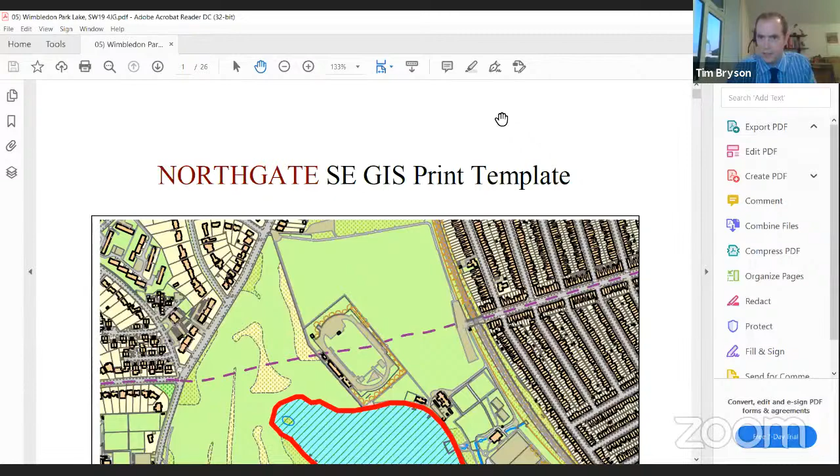Okay, so we'll go straight into item 5, which is Wimbledon Park Lake, and I'm sure we have an officer online who will present this application. Yes, thank you, Chair. Just going to share my screen. Can you see that, Chair? Yes, we can, and we can hear you.

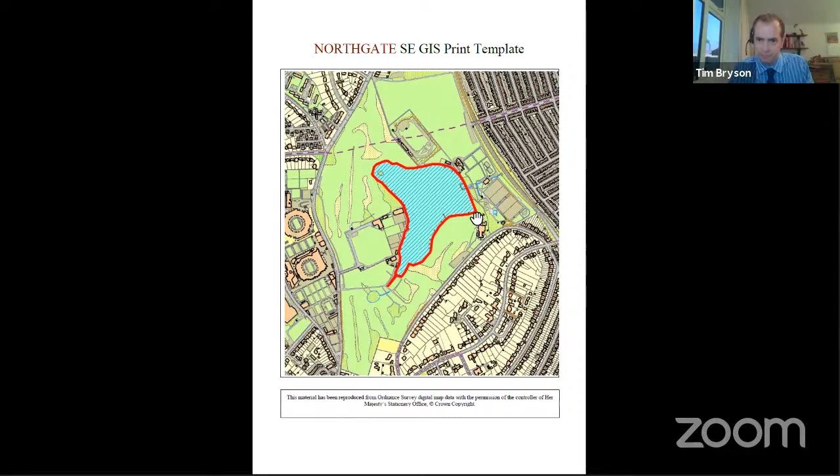Great. Members, the application site is Wimbledon Park and its lake. Wimbledon Park is a Grade 2 star listed park. It is sited within Wimbledon, east of the main site for the All England Lawn Tennis Club. The proposal itself is for engineering works to the existing lake and surroundings in order to make the lake safe as required under the Reservoirs Act.

The application has been put forward. The applicant is the council, with agents representing, as the council is responsible for maintenance and upkeep of the lake. The proposal comprises several forms of engineering operations.

Starting on the northwestern side, an auxiliary spillway is to be created here. What that involves is a replacement of the existing footpath surface with a new one, bedded in at a slight angle, angling down towards the lake. New curb edging is also proposed along the northern boundary, roughly 12.5 centimeters in height.

Further along, the footpath is also to be replaced, all in tarmac surface. Again, further curb edging is proposed along the northern boundary. Additional planting is proposed along the northern boundary as well, and a replacement gravel surface is proposed where that green line is, to accommodate and protect the existing trees immediately adjacent to the lake.

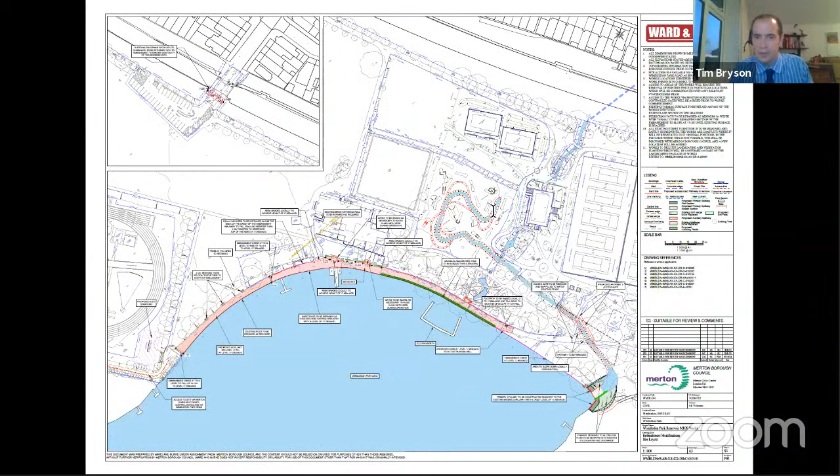A new brook would also be formed through the park to accommodate the water runoff and to hold water back before it is discharged further downstream. That would cut through the existing mini golf area, but once completed, it would not result in the loss of the mini golf zone.

So a lot of the drawings, members, as you've seen in the pack, are very technical. I'm not going to present them all, but again, this is the northern part where the auxiliary spillway is to be formed with replacement surface.

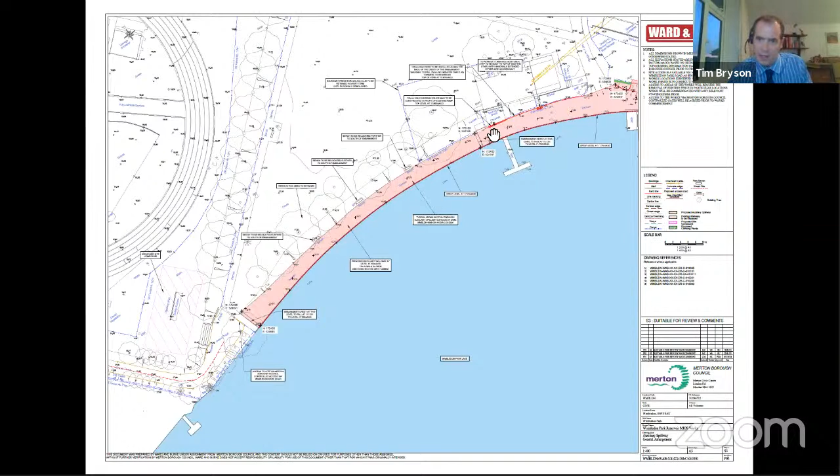Further to the far east, this is a close-up of the proposed enlargement to the existing spillway. The green line here is a proposed eel pass to allow for eels to come in and out through here.

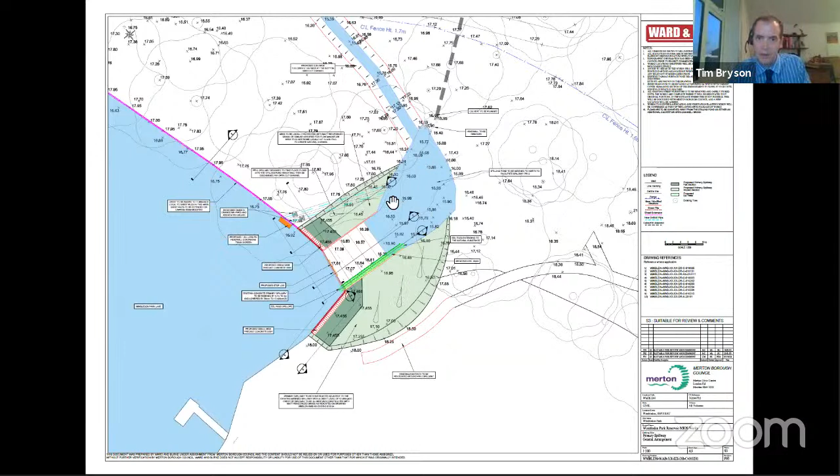This area here and here is the new embankments to be formed, which will be grasscrete. No new tree planting can be done within the new embankments, as under the engineering design, this would not make the embankments work. The existing stilling pond would be widened here.

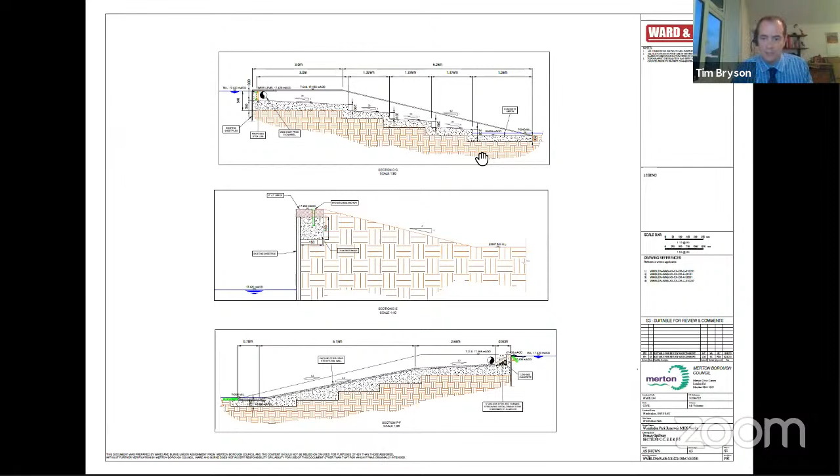One section drawing just showing the new spillway and how it will be formed, largely a stepping in style and design. As outlined in the report, the application has been subject to 4 or 5 years in preparation for the submission through the technical steering group as part of the council.

As outlined within the report, 10 trees are to be removed as part of the proposal to widen the spillway in this zone here. The trees are outlined within the report, the type and species, and the ones shown red here are the ones to be removed.

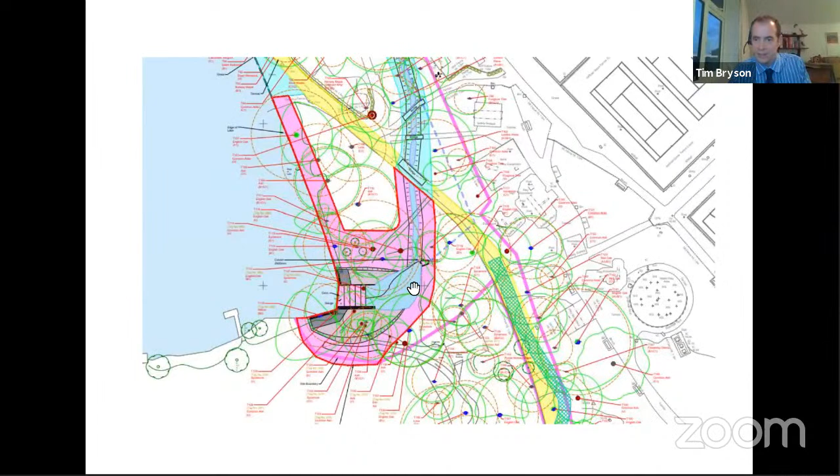You'll note within the report that this area of the site is largely concealed from public view. The children's play area is to the east, and then a large number of trees would be retained and protected for the duration of the works.

Soft additional landscaping is proposed, particularly with regard to the new brook that would be formed through here. Further additional replacement tree planting is to be provided.

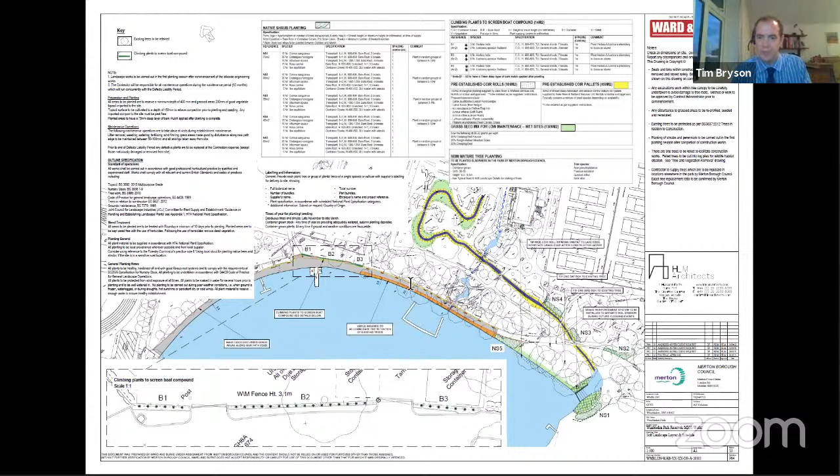This is to be controlled via condition 5, as Historic England have recommended they be consulted as part of the tree planting exercise to ensure the species are acceptable within listed park status.

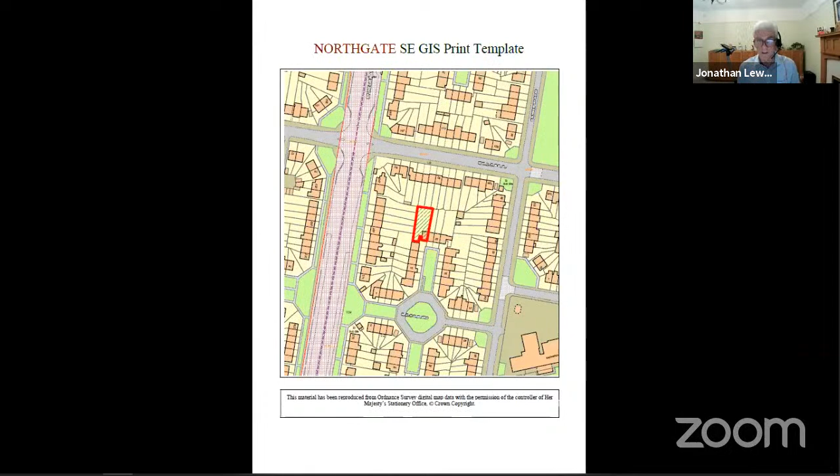Okay, thank you very much for that. Right, questions from members of the committee?

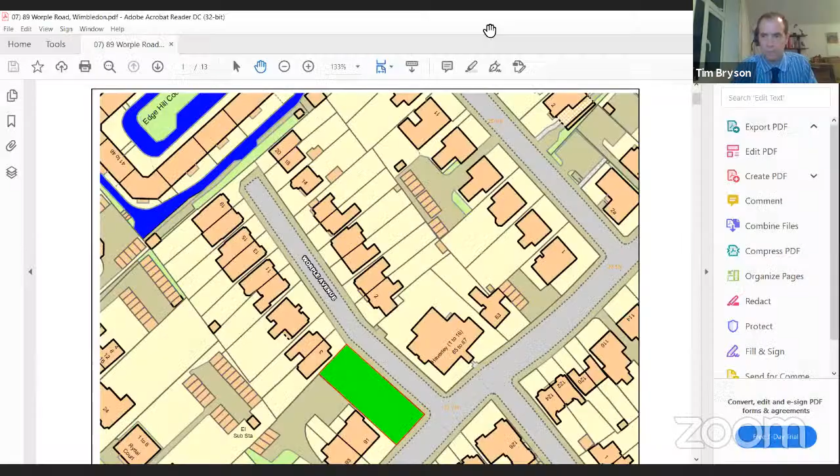I'll just share my screen. Yes, we can see that and we can hear you. Thank you. Great. Members, the application is at 89 Worple Road. It's currently a detached block of 8 flats in Wimbledon.

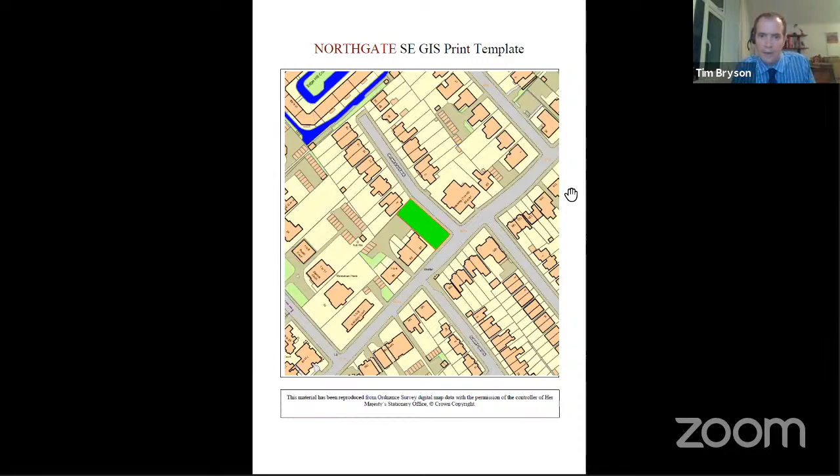The proposal is a prior approval application under the General Permitted Development Order to erect an additional story to the existing block of flats to create 2 additional flats within 1 story. You note within the planning history that there was a refusal for a previous application under the same process, which officers delegated refusal, and I have an elevation showing so you can compare between.

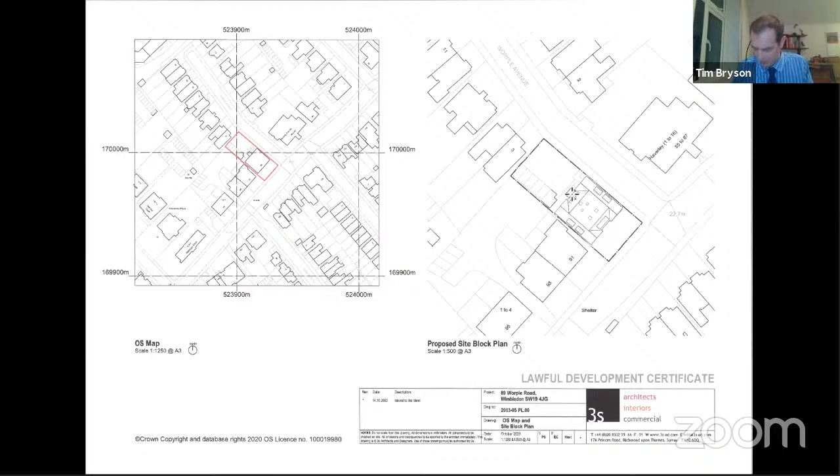So this application, the existing building, 4 stories, which is here. This is the front. Neighbouring block of flats to the northeast, and older, more period properties to the left, which have also been converted into flats.

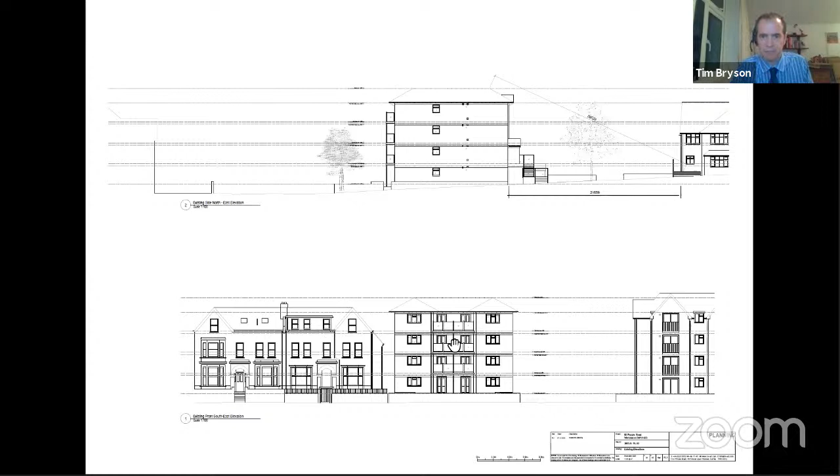The proposal, so two bedroom flats would be proposed. So it would take the block from 8 flats to 10. The design of the proposal would take the form of a sort of a rooftop design, so that it would be flats accommodated at top floor level within the roof void. So you have pitched roofs and dormer windows.

So as shown here from the front, you can just see the dotted outline of the existing, and then proposed is as shown. So the design proposed is to largely mimic some of the existing gable features noted in the surrounding area.

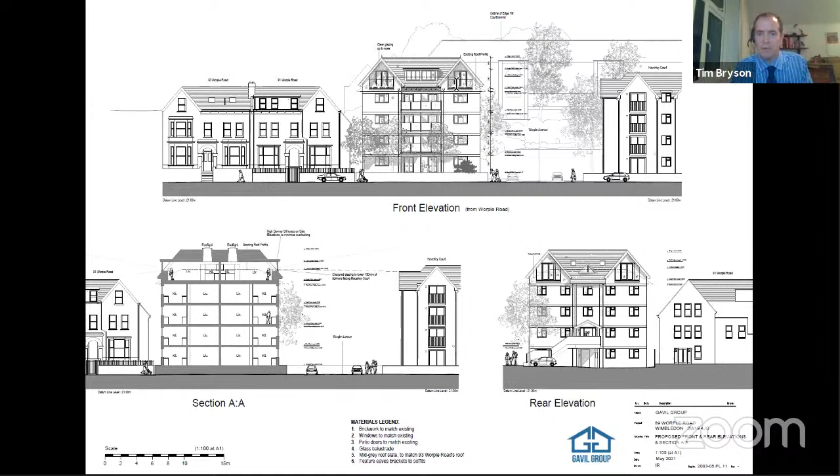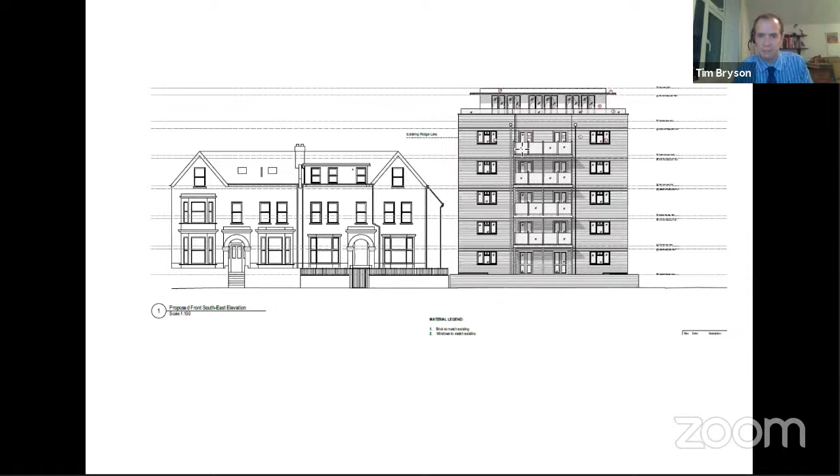Members, this is the previously refused scheme, so that sought 2 extra floors under the prior approval procedure. However, officers determined it didn't meet the appearance of the building test and felt it was out of keeping. So that's there just for your reference.

So Chair, overall, officers satisfied that it has met the tests of the general permitted development order and recommend prior approval be granted. Thank you.

Thank you very much. We move to the committee for questions first. I have any questions from the members? One, Councillor Southgate and then Draper. Peter. Yes, Chair, forgive me if I've missed it, but amenity space, I don't find any information on that.

Okay, I think I'm going to take all 3 questions and then go back to the officer to answer all 3. So I hope you're taking notes there, Tim. So Councillors Draper and then McGrath.

Nick. Yeah, I was just looking at this, and clearly the top floor as designed looks much nicer than the rest of it. Will there be any amendments to the rest of the building to bring it more into keeping with itself? Thank you. And Councillor McGrath.

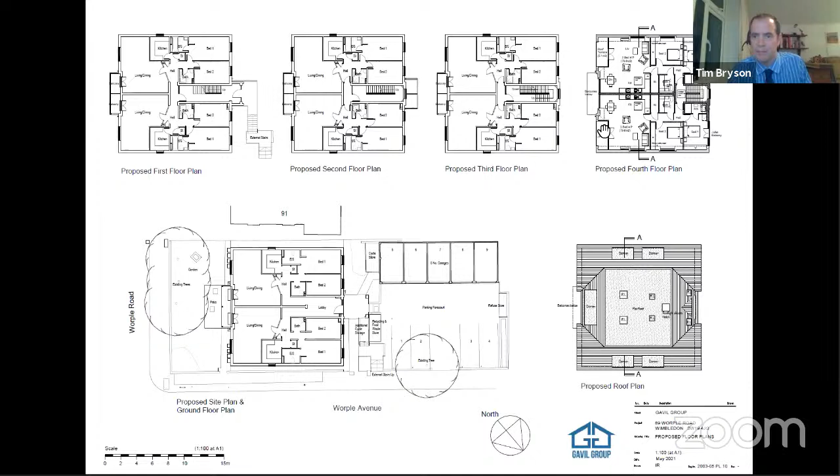Thank you, Chair. Yes, in terms of amenity space, each flat does propose a little outdoor amenity space at top floor level. If I just share my screen to show you, it's off the living/kitchen area, so small outdoor amenity spaces are provided there.

In terms of amendments to the rest of the building, no, the proposal is just for the additional floor itself, so no amendments to the rest of the building are proposed. And it is a 1-story extension. If there is reference, Chair, to 2-story, I apologise, that is a typo. It is a 1-story extension proposed for this application. And in terms of the tests of the GPDO, a matter of judgment is the appearance of the building criteria, so yes, that is the matter of judgment before members this evening.

Thank you very much for that. There being no more questions, comments from members of the committee on this application? Councillor Southgate and Draper in that order. Thank you.

I find on page 104.5 the inspector's judgment extraordinary, that we are not allowed to take impact on the street scene into account, unless I have misunderstood that - that we still have that discretion, but the matter of permitted development in terms of adding stories is not something we can comment on. So perhaps I should have asked that as a question rather than a statement, but as it stands, it would seem we're being instructed to ignore the impact on the street scene, which surely is the very heart of what we're trying to do, is to see how these buildings will sit within the landscape, the street scene we have.